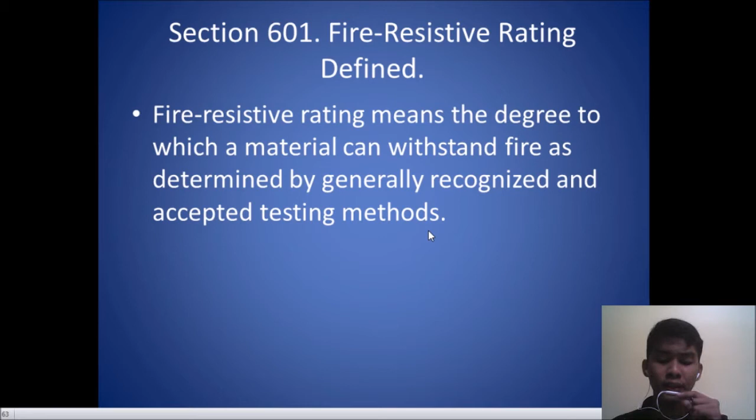Section 601, fire-resistive rating defined. Fire-resistive rating means the degree to which a material can withstand fire as determined by generally recognized and accepted testing methods. This means a material is being measured and given a rate on how high it can resist fire.

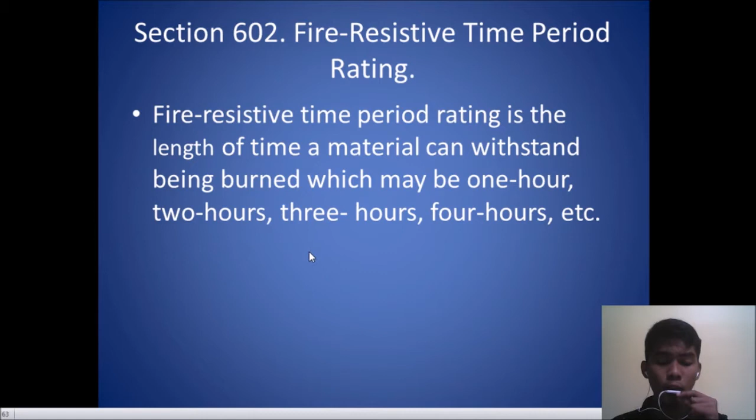Second, Section 602, fire-resistive time period rating is the length of time a material can withstand being burned, which may be 1 hour, 2 hours, 3 hours, 4 hours, etc. This means a material is measured on how long it can resist fire.

Third, Section 603, Fire-Resistive Standards. All materials of construction, and assemblies or combination thereof shall be classified according to their fire retardant or flame spread ratings as determined by generally accepted testing methods and or by the Secretary. There are materials that claim they can resist fire, however, there are certain standards to be followed. It should also be tested before they can claim fire resistance.

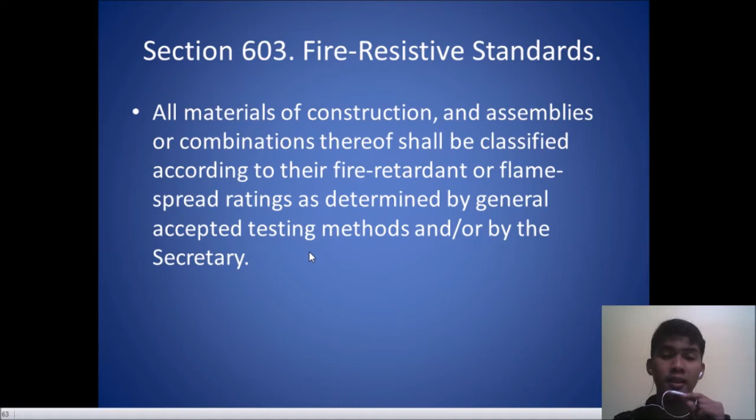Next, Section 604, Fire-Resistive Regulations. The Secretary shall prescribe standards and promulgate rules and regulations on the testing of construction materials for flame spread characteristics, test of fire damages, fire test of building, construction, and materials, door assemblies and tin-clad fire doors and window assemblies, and the installation of fire doors and windows and smoke and fire detectors for fire protective signaling systems.

Application and use of controlled interior finish. Fire-resistive protection for structural members. Fire-resistive walls and partitions. Fire-resistive floor or roof ceiling. Fire-resistive assemblies for protection of openings and fire retardant roof coverings.

From this section, there are certain standards and rules for testing the construction of materials for fire testing, also on how to assemble and where to place it in a certain area. All of those rules should be followed to avoid any complication.

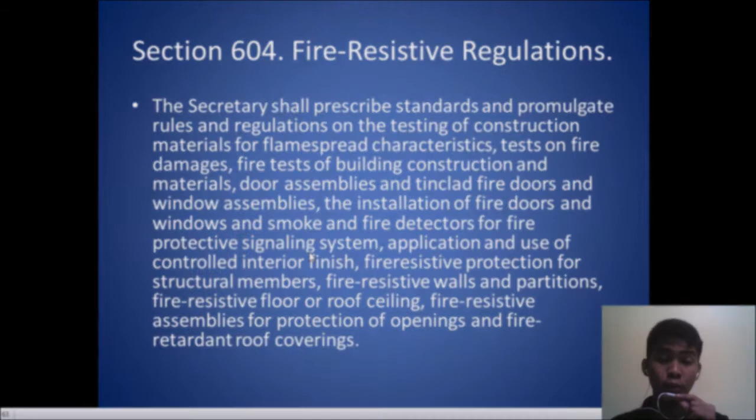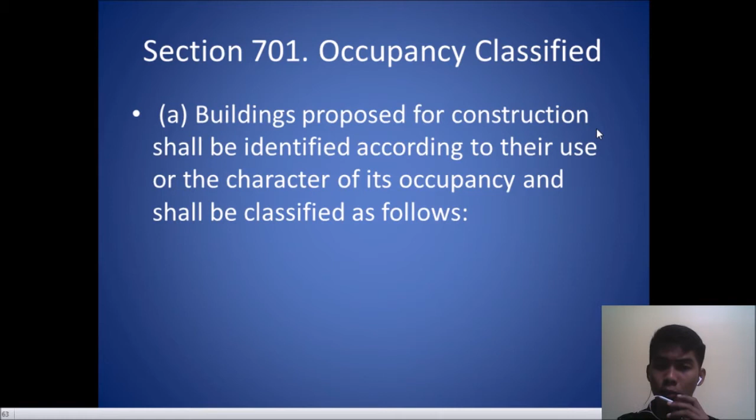To Chapter 7, Classification and General Requirement of all buildings by use or occupancy. Section 701, Occupancy Classified. Buildings proposed for construction shall be identified according to the use or the character of its occupancy and shall be classified as follows: Group A, residential dwellings; Group B, residential hotels and apartments; Group C, education and recreation; Group D, institutional; Group E, business and mercantile; Group F, industrial.

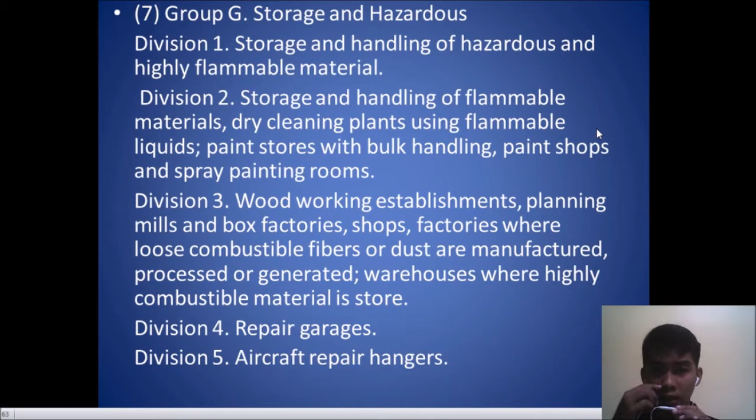Group G, storage and hazardous. Under this, Division 1, storage and handling of hazardous and highly flammable materials. Division 2, storage and handling of flammable materials, dry cleaning plants using flammable liquids, paint stores with bulk handling, paint shops and spray painting rooms. Division 3, woodworking establishments, planing mills and box factories, shops, factories where loose combustible fibers or dust are manufactured, processed or generated, warehouses where highly combustible material is stored.

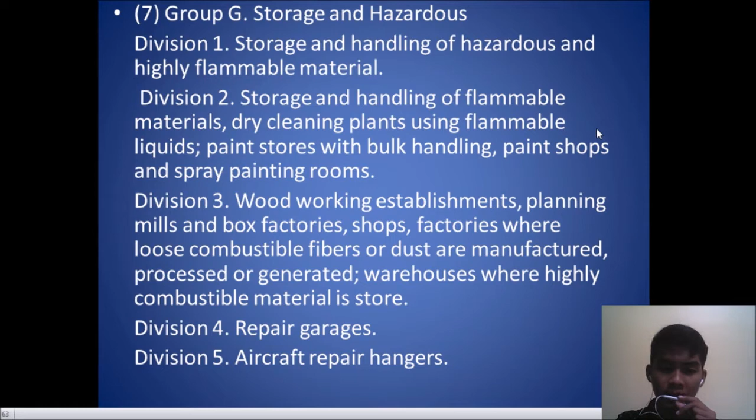Division 4, repair garages. Division 5, aircraft repair hangars. So Group H, assembly other than Group I. Division 1, any assembly building with a stage and an occupant load of less than 1,000 in the building. Division 2, any assembly building without stage and having an occupant load of 300 or more in the building. Division 3, any assembly building without a stage and having an occupant load less than 300 in the building. Division 4, stadia, reviewing stands, amusement structures not included with Group I or in Division 1, 2, 3 of this group.

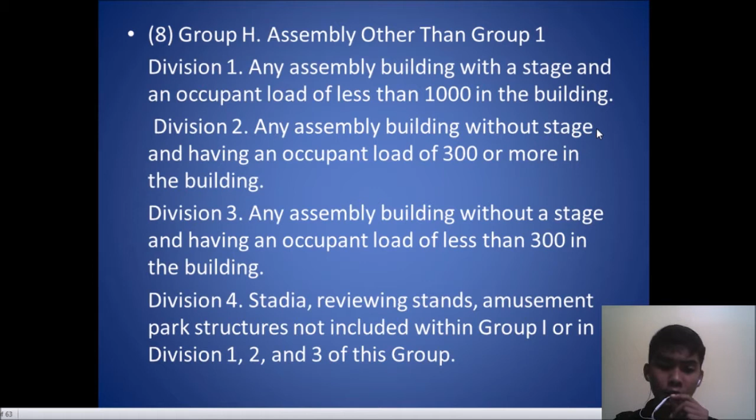Then Group I, assembly occupant load 1,000 or more. Group J, Accessory. Division 1, private garage, carport, sheds, and agriculture buildings. Division 2, fences over 1.80 meters high, tanks, and towers.

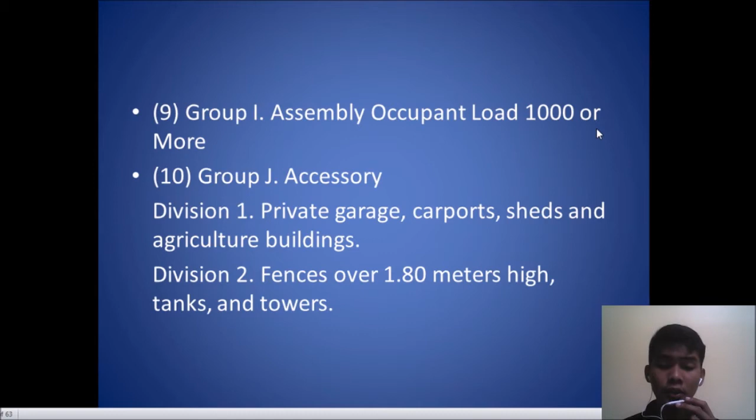So for this section, it allows us to know the classification of occupancy. This way, this classification can be thoroughly examined. What are the requirements needed?

Section 702, Change in use. No change shall be made in the character of occupancy or use of any building which would place the building in a different division of the same group of occupancy or in a different group of occupancies unless such building is made to comply with the requirements of this code for such division or group of occupancy.

So this means there shall be no changes on the occupancy category of a building. For example, if the building was a commercial building before and that is being used as a hospital, that is not allowed, unless the building is made to comply with the requirements of the code for such division.

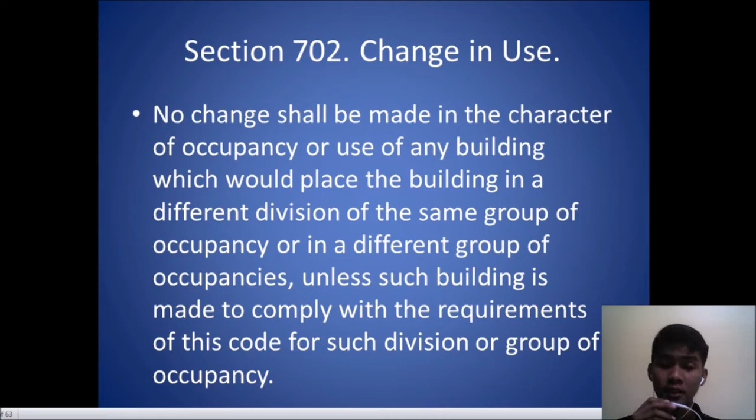Next is Section 703, Mixed Occupancy. There are general requirements when a building is of mixed occupancy or used for more than one occupancy. The whole building shall be subject to the most restrictive requirements pertaining to any of the types of occupancy found therein, except in the following.

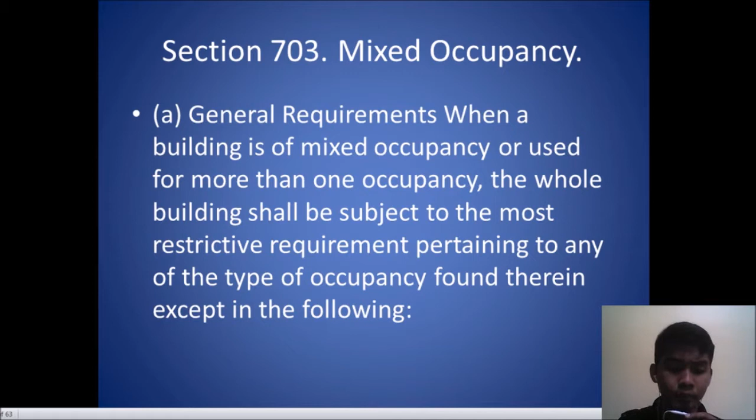A. When a one-story building houses more than one occupancy, each portion of the building shall conform to the requirement of the particular occupancy housed therein. Number 2. Where minor accessory uses do not occupy more than 10% of the area of any floor of a building, nor more than 10% of the basic area permitted in the occupancy requirements, in which case the major use of the building determines the occupancy classification.

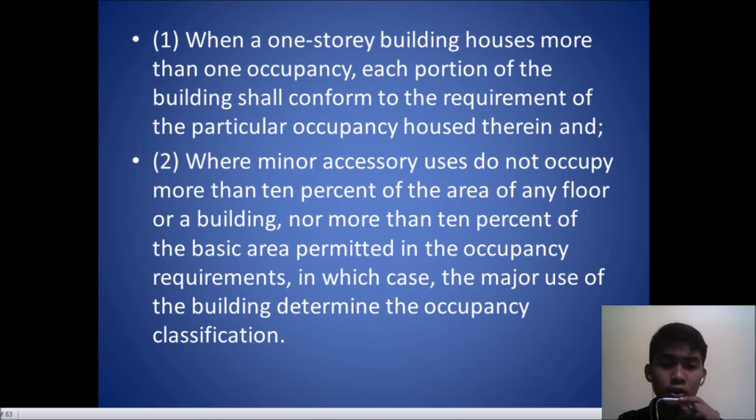B. Forms of occupancy separation. C. Types of occupancy separation. And D is fire rating for occupancy separation. So this means that the building is a multi-purpose building which may have more than one occupancy. It will be subjected to more restrictive requirements which can abide by both occupancy requirements.

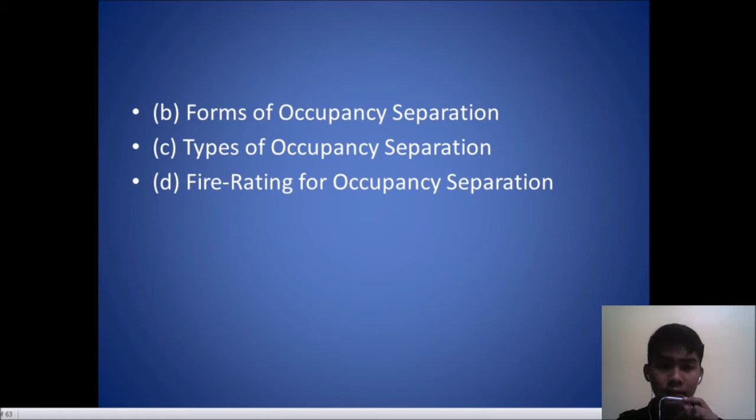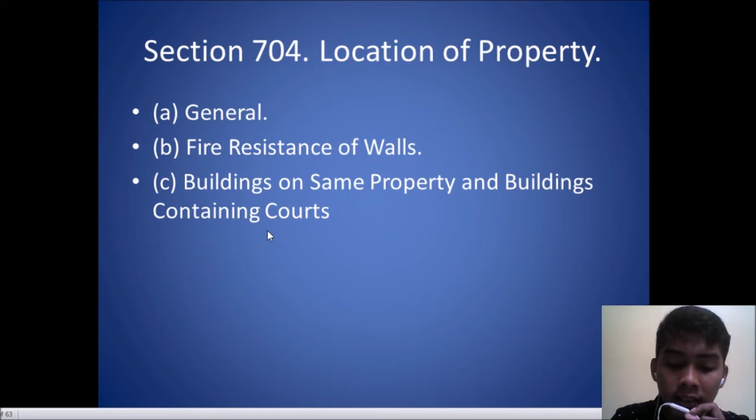So next, Section 704, location of property. First, general. B. Fire resistance of walls. C. Buildings on same property and buildings containing courts. So it means the location of the building shall have a direct access to public space or yard. The property line should be considered adjacent to the street.

So Section 705, allowable floor areas. For purposes of this section, each portion of a building separated by one or more area separation walls may be considered a separate building provided the area separation walls meet the requirements prescribed therefor by the Secretary. There should be one or more area separation walls considered, and they shall be in accordance with the prescribed requirements of the Secretary.

706. Allowable floor area increases. The floor areas hereinabove provided may be increased in certain specific instances and under appropriate conditions, based on the existence of public space, streets or yards extending along and adjoining two or more sides of the building or structure, subject to the approval of the building official. It means floor area may be increased with specific conditions and also shall be approved by the building official.

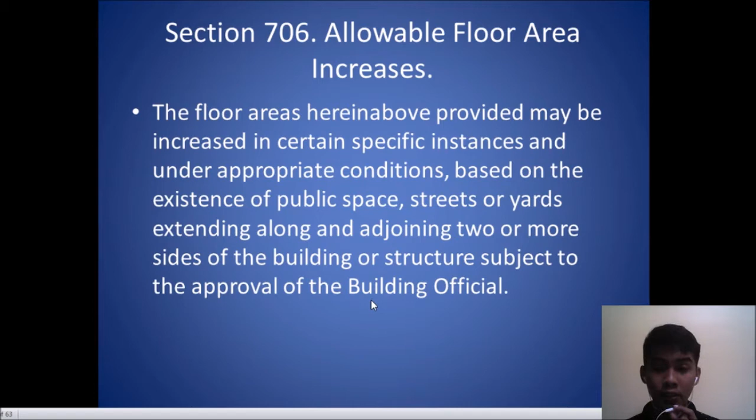Next, Section 707, maximum height of buildings. So in this section, it means the height of the building per floor depends on how the building is going to be used. It will depend on the occupancy classification.

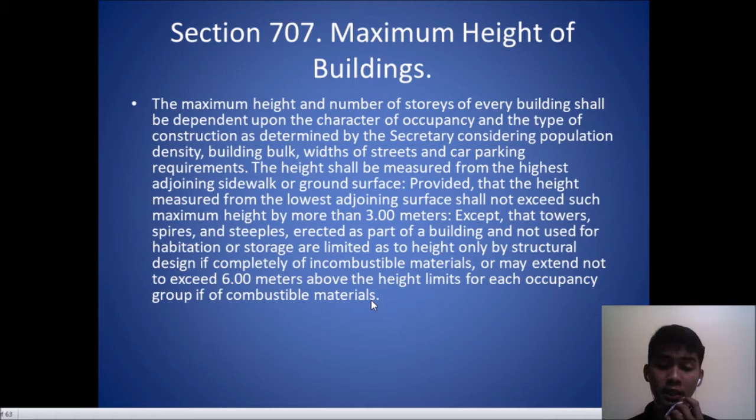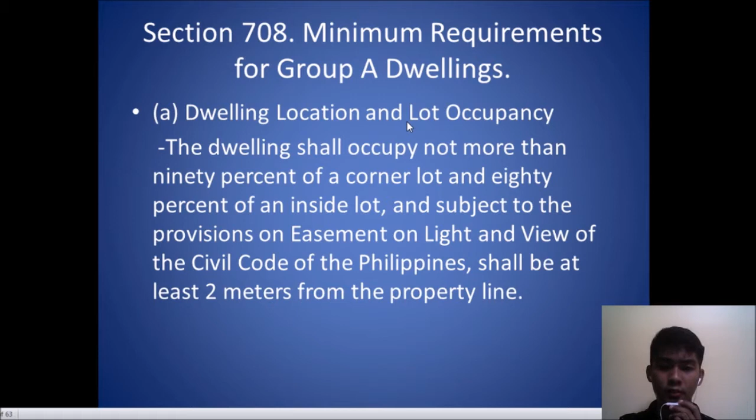Next, Section 708, minimum requirements for Group A dwellings. A. Dwelling location and lot occupancy. The dwelling shall occupy not more than 90% of a corner lot and 80% of an inside lot, and subject to the provisions on easement on light and view of the Civil Code of the Philippines, shall be at least 2 meters from the property line. So 2 meters from the property line.

B. Light and ventilation. Every dwelling shall be so constructed and arranged as to provide adequate light and ventilation as provided under Section 805 of this code. C. Sanitation. Every dwelling shall be provided with at least one sanitary toilet and adequate washing and drainage facilities.

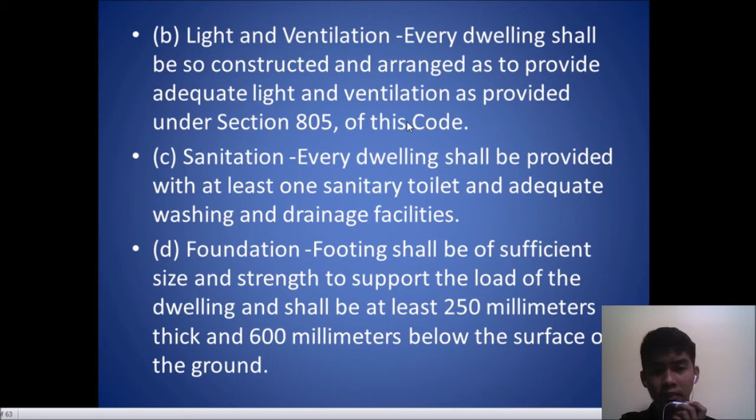Next, posts. Then, floor. The live load of the first floor shall be at least 200 kilograms per square meter, and for the second floor at least 150 kilograms per square meter. Roof. The wind load for roof shall be at least 120 kilograms per square meter for vertical projection. Stairs. Stairs shall be at least 750 millimeters in clear width with a rise of 200 mm and a minimum run of 200 mm.

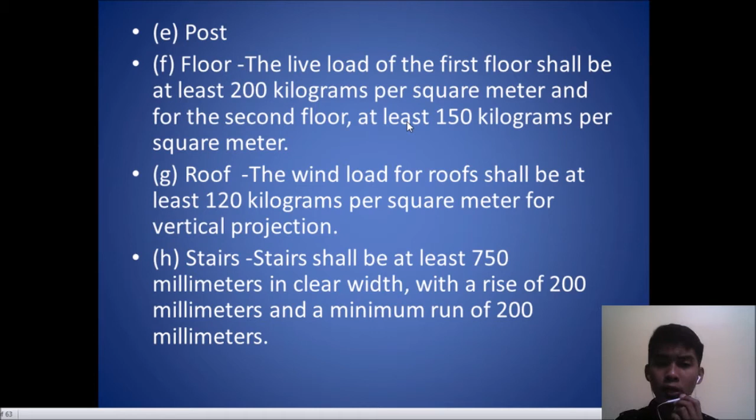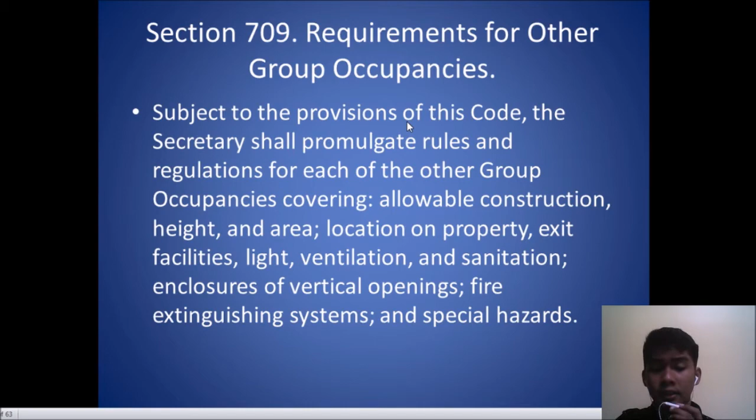So entrance and exit, then electrical requirements and mechanical requirements. So Section 708 explains the minimum requirements for Group A dwellings. Then Section 709, the Secretary. This means that the Secretary shall provide rules and regulations for other group occupancies covering allowable construction, height and area.

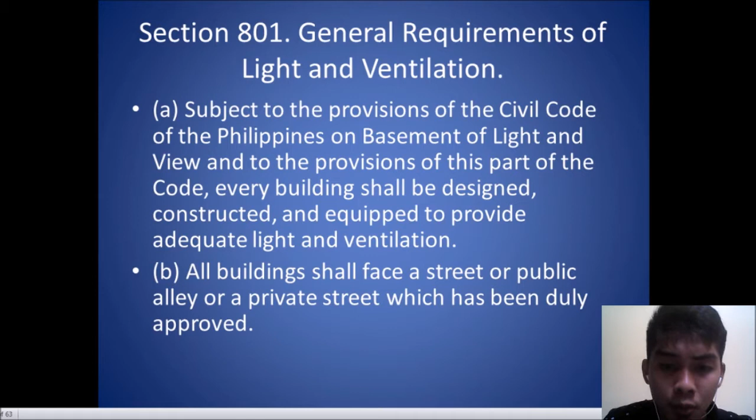Chapter 8. Light and ventilation. Section 801, general requirements of light and ventilation. Letter A. Subject to the provisions of the Civil Code of the Philippines on easement of light and view, and to the provisions of this part of the code, every building shall be designed, constructed, and equipped to provide adequate light and ventilation. All buildings shall face a street or public alley or private street which has been duly approved.

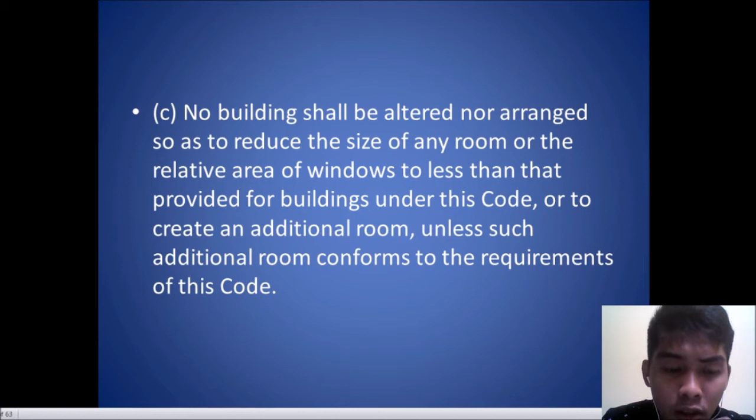No building shall be altered nor arranged so as to reduce the size of any room or the relative area of windows to less than that provided for buildings under this code, or to create additional room unless such additional room conforms to the requirements of this code. D. No building shall be enlarged so that the dimensions of the required court or yard would be less than that prescribed for such building.

So in this section, buildings shall be provided with the proper light and ventilation. Also, it shall face a street or public alley. Also, it shall follow the prescribed dimension of any room.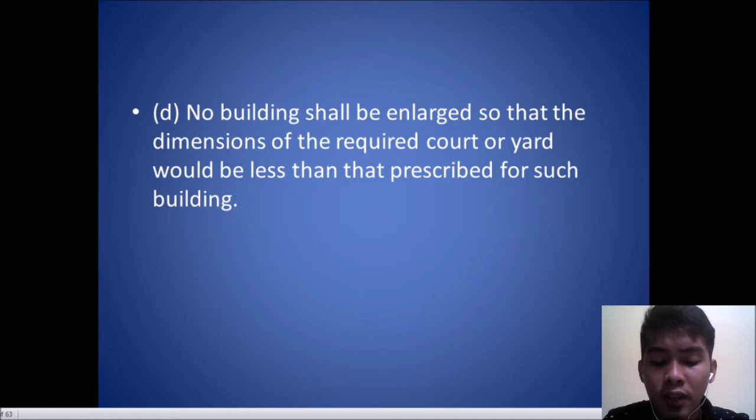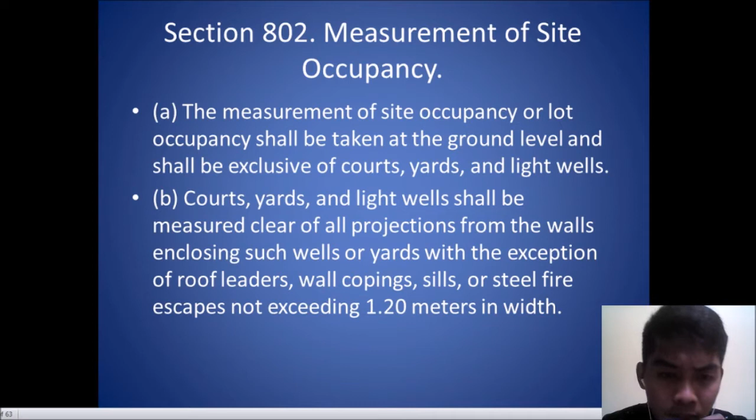Then, Section 802, measurement of site occupancy. The measurement of site occupancy or lot occupancy shall be taken at ground level and shall be exclusive of courts, yards, and light wells. Courts, yards, and light wells shall be measured clear of all projections from the walls enclosing such wells or yards, with the exception of roof leaders, wall copings, sills, or steel fire escapes not exceeding 1.2 meters in width.

Section 803, percentage of site occupancy. Maximum site occupancy shall be governed by the use, type of construction, and height of the building, and the use, area, nature, and location of the site, and subject to the provisions of the local zoning requirements and in accordance with the rules and regulations promulgated by the Secretary.

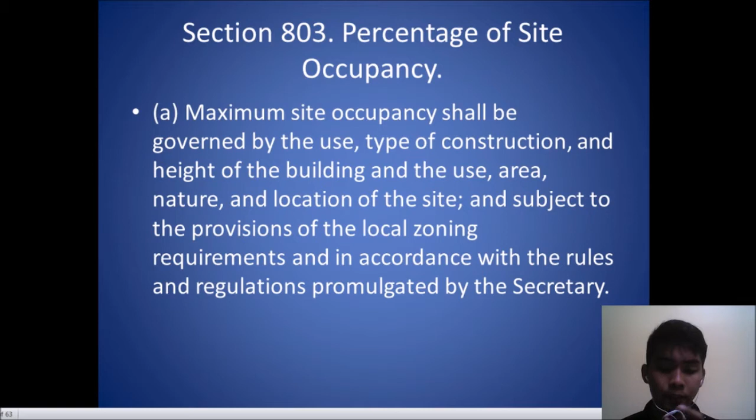Then size and dimensions of courts. Minimum size of courts and their least dimensions shall be governed by the use, type of construction, and the height of the buildings provided in the rules and regulations promulgated by the Secretary, provided that the minimum horizontal dimension of courts shall be not less than 2 meters. B. All inner courts shall be connected to a street or yard, either by a passageway with a minimum width of 1.2 meters, or by a door through a room or rooms.

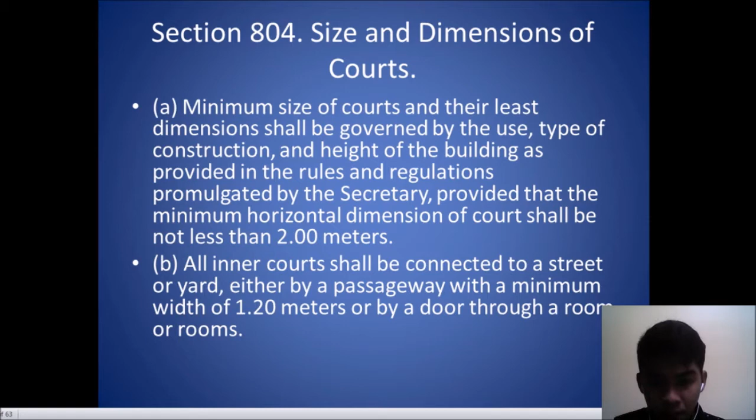This means that the minimum horizontal dimension of a court shall not be less than 2 meters and inner courts shall be connected by a passageway with a minimum width of 1.2 meters. So,

Section 805, ceiling height. Habitable rooms provided with artificial ventilation have ceiling heights not less than 2.4 meters, measured from the floor to the ceiling, provided that for buildings of more than one story, the minimum ceiling height of the first story shall be 2.7 meters, and that for the second story, 2.4 meters, and succeeding stories shall have an unobstructed typical head clearance of not less than 2.1 meters above the finished floor line.

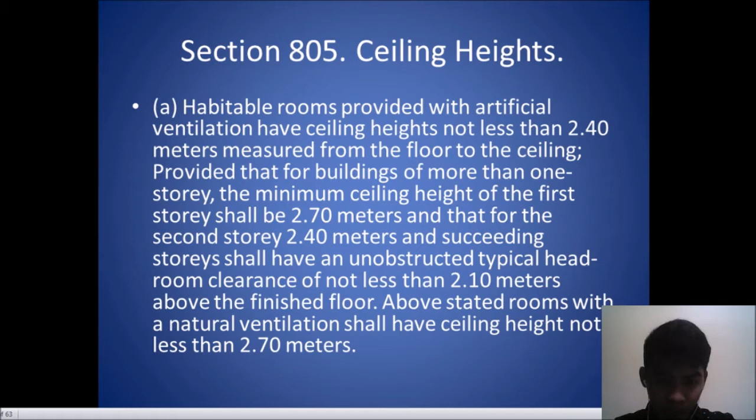Above stated rooms with natural ventilation shall have ceiling height not less than 2.7 meters. B. Mezzanine floors shall have a clear ceiling not less than 1.8 meters above and below it.

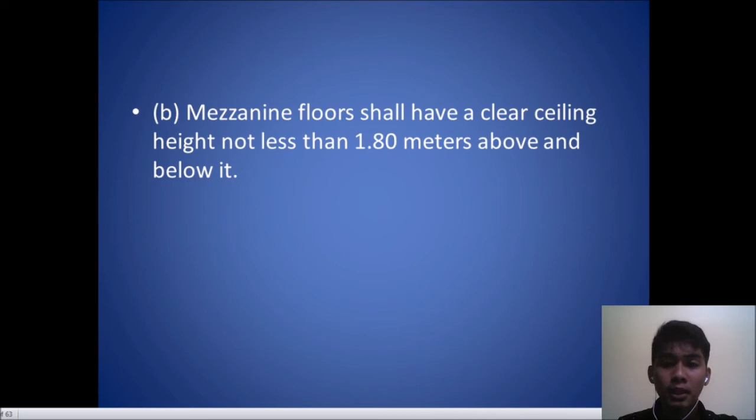So, section 806, size and dimensions of rooms. Minimum sizes of rooms and their least horizontal dimensions shall be as follows. Number 1. Rooms for human habitation, 6 square meters with a dimension of 2.

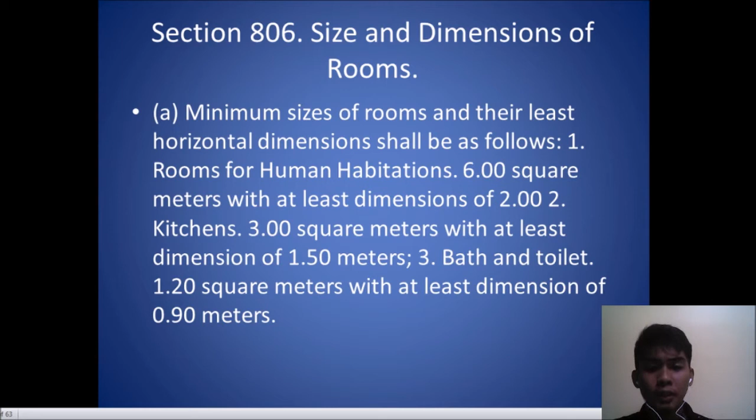So, section 807, air space requirements in determining the size of rooms. A minimum space shall be provided as follows. School rooms, 3 cubic meters with 1 square meter of floor area per person. Again, 3 cubic meters with 1 square meter of floor area per person. Number 2, workshops, factories, and offices, 12 cubic meters of space per person. Number 3, habitable rooms, 14 cubic meters of space per person.

So in this section, it's per person and space.

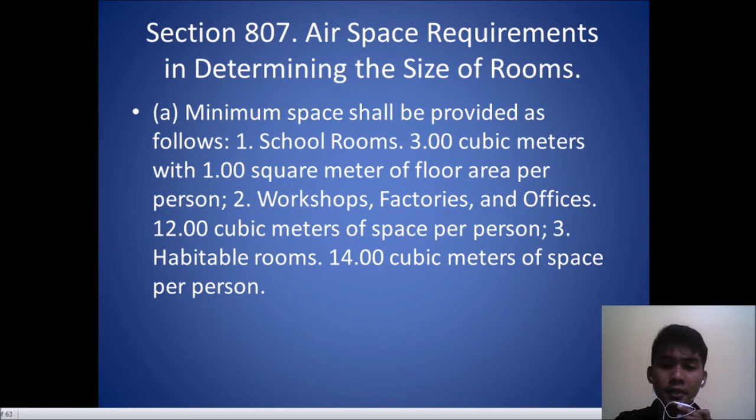So section 808, window openings. Every room intended for any use not provided with artificial ventilation system as specified in this code shall be provided with a window or windows with a total free area of openings equal to at least 10% of the floor area of the room. Such window shall open directly to a court, yard, public street or alley or open water courses. So, for a room intended for any use, a window shall be provided if there is no artificial ventilation.

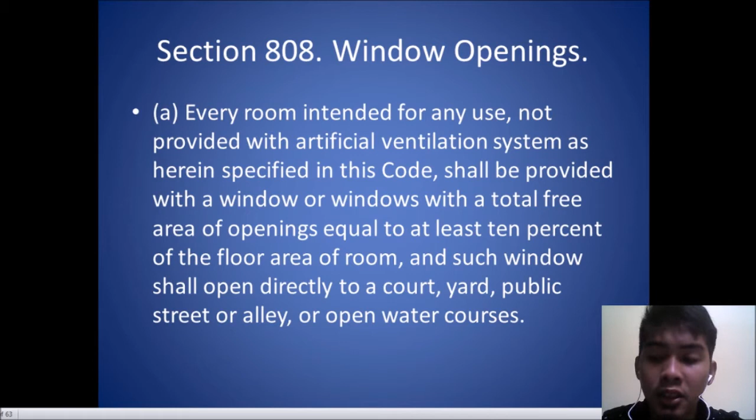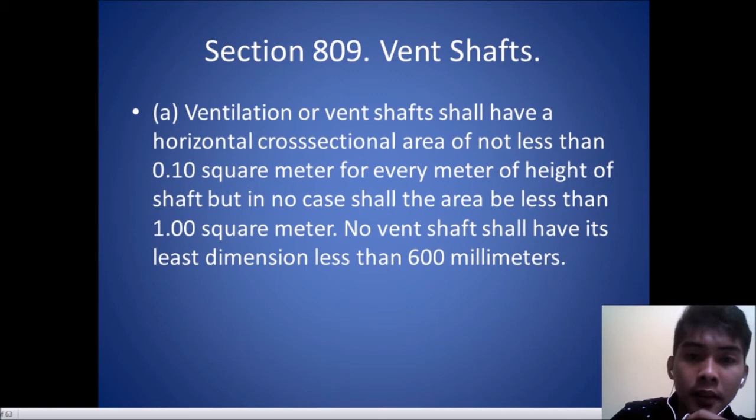Section 809, vent shafts. A. Ventilation or vent shafts shall have a horizontal cross-sectional area of not less than 0.1 square meter for every meter of height of shaft, but in no case shall the area be less than 1 square meter. No vent shaft shall have its least dimension less than 600 mm. B. Skylights, unless open to the outer air at the top for its full area, vent shafts shall be covered by a skylight having a net free area of fixed louver openings equal to the maximum required shaft area.

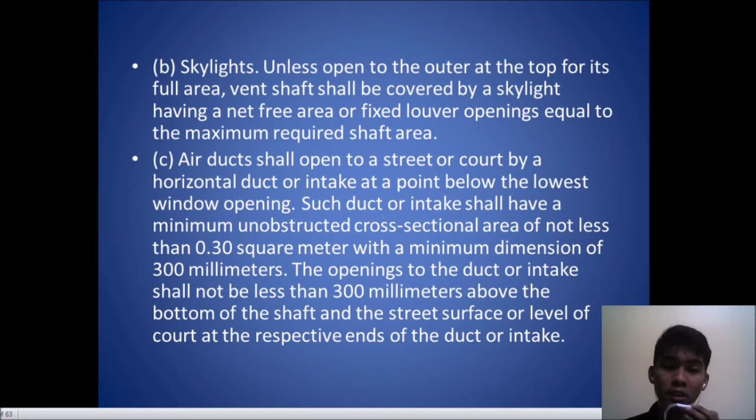C. Air ducts shall open to a street or court by a horizontal duct or intake at a point below the lowest window opening. Such duct or intake shall have a minimum unobstructed cross-sectional area of not less than 0.3 square meter with a minimum dimension of 300 mm. The openings to the duct or intake shall not be less than 300 mm above the bottom of the shaft and the street surface or level of the court at the respective ends of the duct or intake.

So section 810, ventilation skylights. A skylight shall have a glass area not less than that required for the windows that are replaced. They shall be equipped with movable sashes or louvers with an aggregate net free area not less than that required for openable parts in the windows that are replaced, or provided with approved artificial ventilation of equivalent effectiveness.

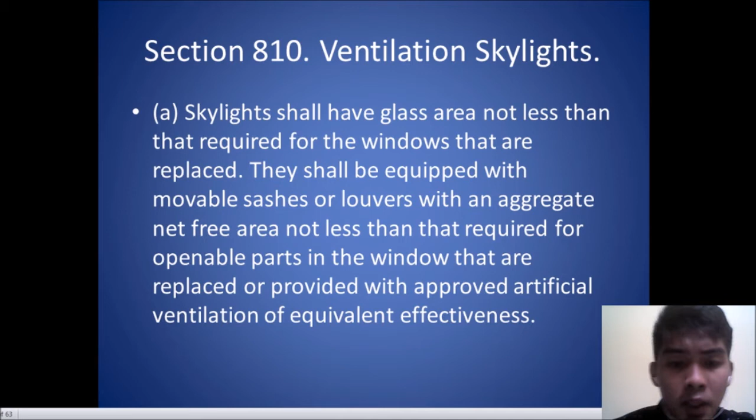Section 811, artificial ventilation. Rooms or spaces housing industrial or heating equipment shall be provided with artificial means of ventilation to prevent excessive accumulation of hot or polluted air. B. Whenever artificial ventilation is required, the equipment shall be designed and constructed to meet the following minimum requirements in air changes.

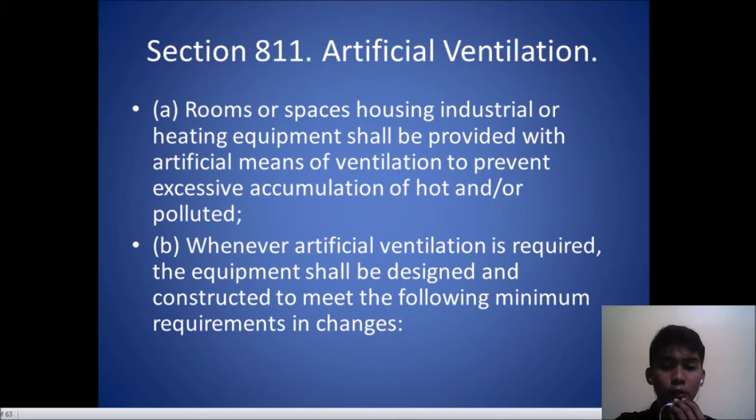For rooms entirely above grade in use for office, clerical, or administrative purposes, or as stores, sales rooms, restaurants, markets, factories, workshops, and machinery rooms, not less than 3 changes of air per hour shall be provided. So, for rooms entirely above the grade, not less than 3 changes of air per hour.

So, number 2, for rooms entirely above grade used as bakeries, hotel or restaurant kitchens, laundries other than accessory to dwellings and boiler rooms, not less than 10 changes of air per hour.

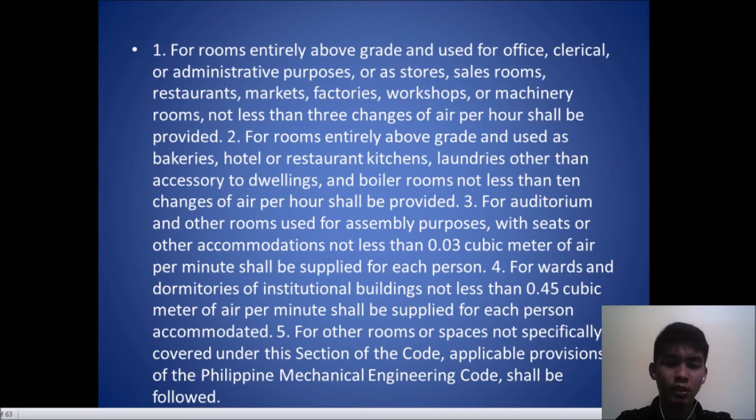Air per minute. Number 5, for other rooms or spaces not specifically covered under this section of the code, applicable provisions of the Philippine Mechanical Engineering Code shall be followed. Chapter 9, Sanitation. So, there are three sections. 901, General.

Subject to the provisions of Book 2 of the Civil Code of the Philippines on property, ownership, and its modification, all buildings hereafter erected, altered, removed, relocated, or repaired for human habitation shall be provided with adequate and potable water supply, plumbing installation, and suitable wastewater treatment or disposal system, storm water drainage, pest and vermin control, noise abatement device,

and such other measures required for the protection and promotion of health of persons occupying the premises and others living nearby. So, after a building is erected, it shall be provided with potable water and other drainage system.

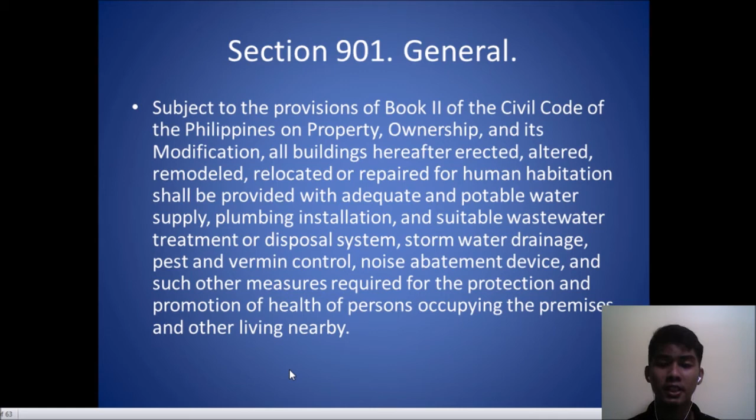So water supply system. Whenever available, the potable water requirements for a building used for human habitation shall be supplied from existing municipal or city waterworks system. So as I said earlier, the supply here in Davao City is the water district, Dumoy.

Then, quality of drinking water from meteoric, surface or underground sources shall conform to the criteria set in the latest approved national standards for drinking water. So, an example of this is in the design. Construction and operation of deep wells for the abstraction of groundwater shall be subject to the provisions of the Water Code of the Philippines.

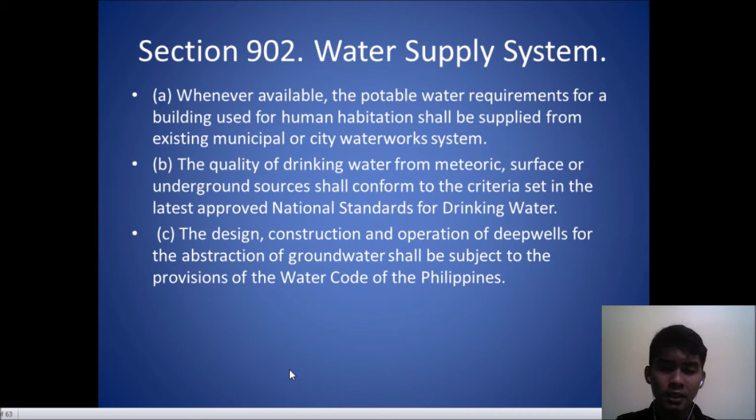Then, construction and operation of independent waterworks systems of private housing subdivisions or industrial estates shall be governed by existing laws relating to local waterworks system. So the water piping installations inside buildings and premises shall conform to the provisions of the National Plumbing Code of the Philippines.

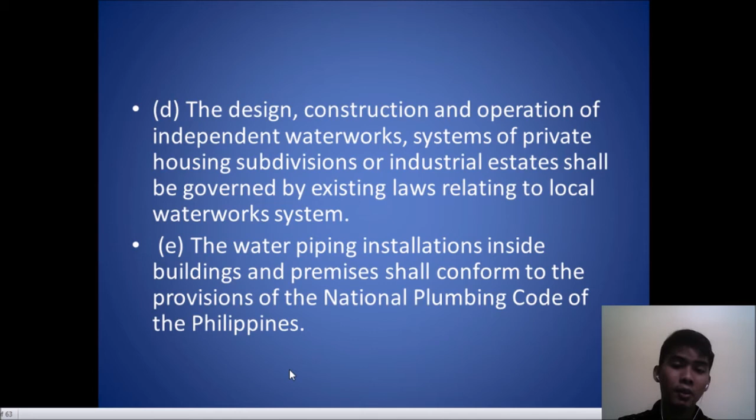Then, Section 903, wastewater disposal system. Sanitary sewage from buildings, neutralized or pretreated industrial wastewater shall be discharged directly into the nearest street sanitary sewer main of existing municipal or city sanitary sewerage system in accordance with the criteria set by the Code on Sanitation and National Pollution Control Commission.

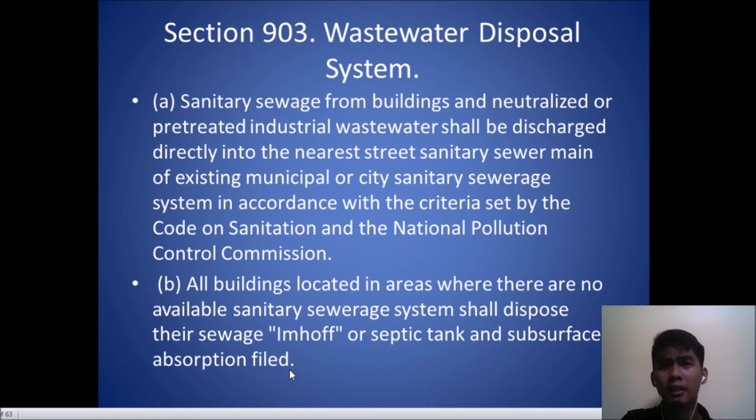All buildings located in areas where there are no available sanitary sewerage systems shall dispose their sewage in Imhoff or septic tank and subsurface absorption field. Then, sanitary and industrial plumbing installations inside buildings and premises shall conform to the provisions of the National Plumbing Code.

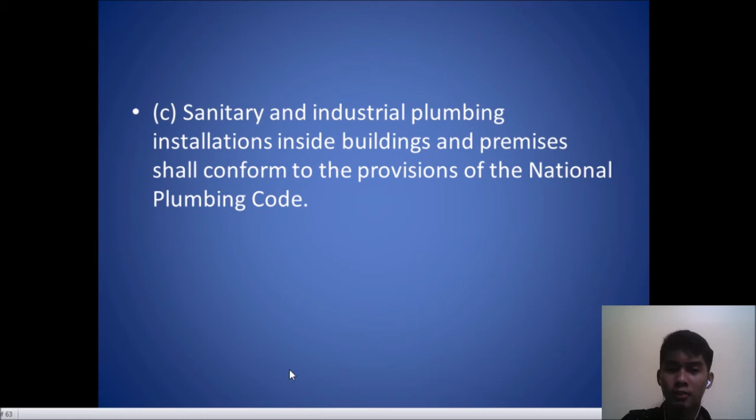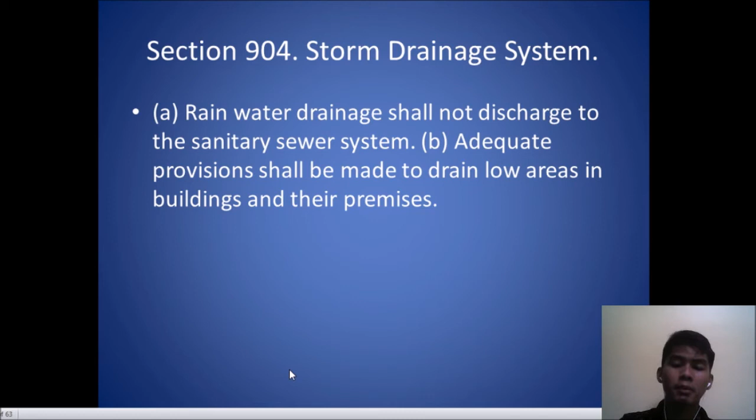Then, Section 904, Storm Drainage System. Rainwater drainage shall not discharge to the sanitary sewer system. Adequate provision shall be made to drain low areas in buildings and their premises. Then, Section 905, Pest and Vermin Control. All buildings with hollow and/or wood construction shall be provided with rat-proofing.

Then, garbage bins and receptacles shall be provided with ready means for cleaning and with positive protection against entry of pests and vermin.

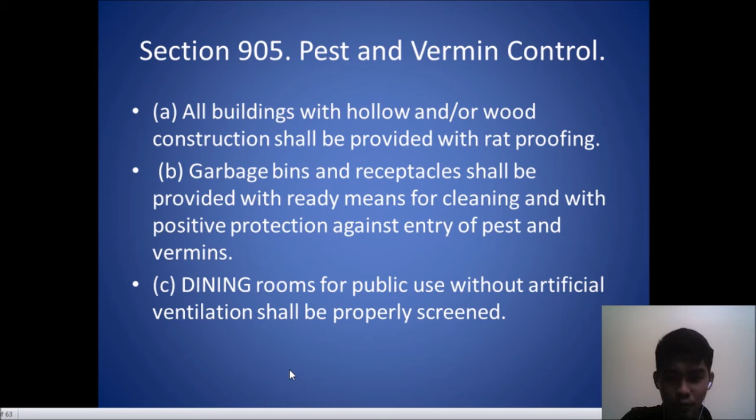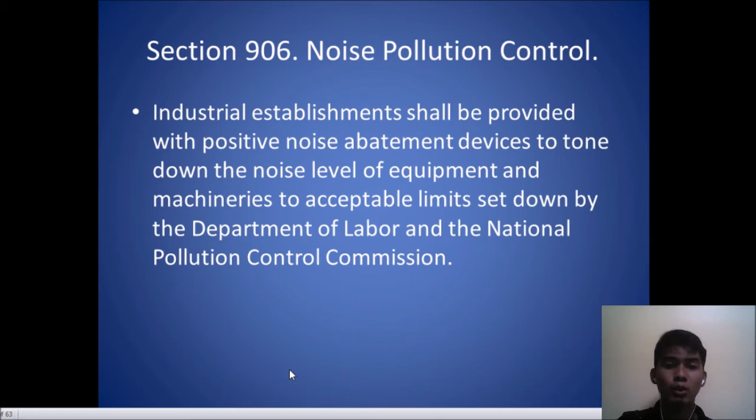Dining rooms for public use without artificial ventilation shall be properly screened. Then, Section 906, Noise Pollution Control. Industrial establishments shall be provided with positive noise abatement devices to tone down the noise level of equipment and machinery to acceptable limits set down by the Department of Labor and the National Pollution Control Commission.

So, Section 907, pipe materials. All pipe materials to be used in buildings shall conform to the standard specifications of the Philippine Standards Council. So, the pipes we use should pass the Philippine Standards Council.

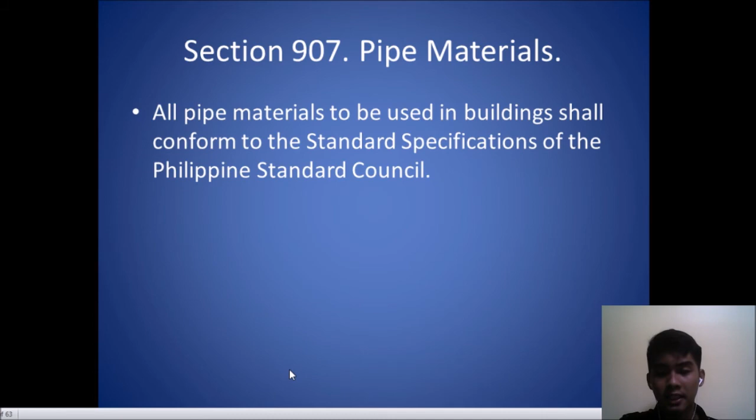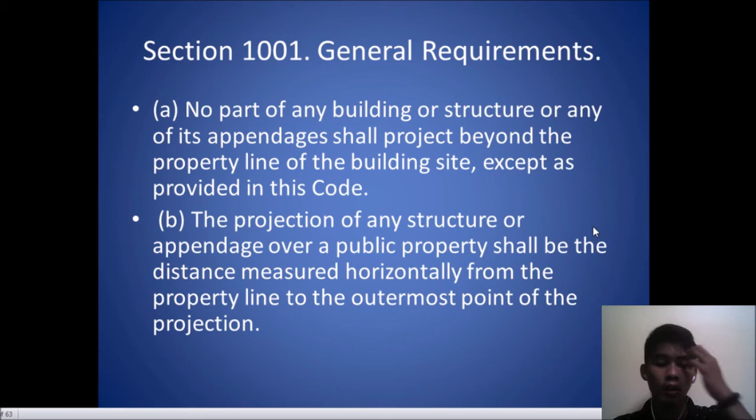So under Section 1001, general requirements, no part of any building or structure or any of its appendages shall project beyond the property line of the building site except as provided in this code. The projection of any structure or appendage over a public property shall be the distance measured horizontally from the property line to the outermost point of the projection. So this means that any building, accessory, or structure shall be within the property line.

Then Section 1002, projection into alleys or streets. No part of any structure or its appendage shall project into any alley or street, national road or public highway except as provided in this code. Footings located at least 2.4 meters below grade along national roads or public highways may project not more than 300 mm beyond the property line.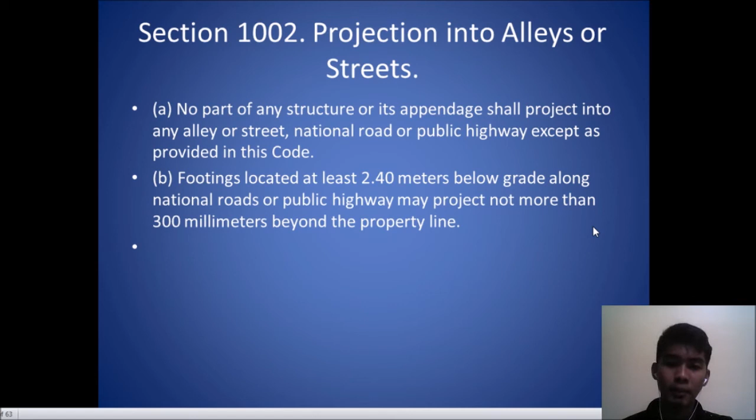Then foundations. Foundations may be permitted to encroach into public sidewalk areas to a width not exceeding 500 mm, provided that the top of the said foundation is not less than 600 mm below the established grade, provided further that said projection does not obstruct any existing facility such as power, communication, gas, water, or sewer lines unless the owner concerned shall pay to the corresponding entities for the rerouting of the parts of the affected facilities.

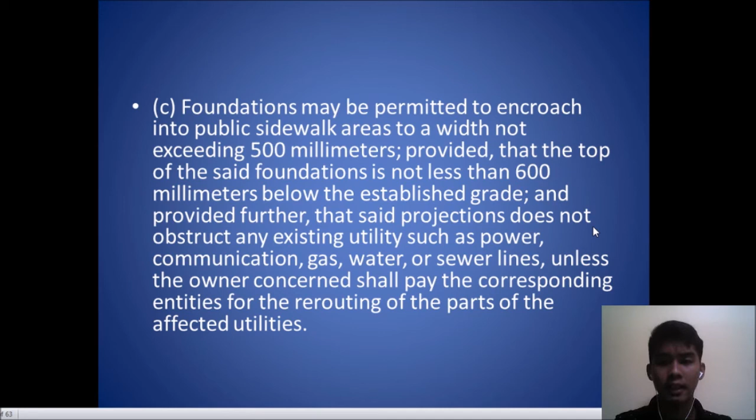Then Section 1003, projection of balconies and appendages over streets. The extent of any projection over an alley or street shall be uniform within a block and shall conform to the limitations set forth in Table 1003A, projection of balconies and appendages, Annex B2. So, there's a table 1003.

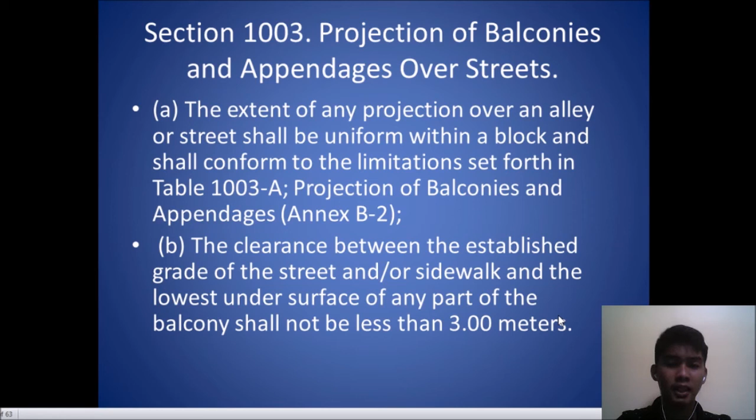The clearance between the established grade of the street or sidewalk and the lowest undersurface of any part of the balcony should not be less than 3 meters. So, it should not be less than 3 meters. It may exceed 3 meters, the clearance between the established grade and the street or sidewalk.

Then, Section 1004, arcades. Whenever required by existing building and zoning regulations, arcades shall be constructed on sidewalks of streets. The width of the arcade and its height shall be uniform throughout the street, provided that in no case shall an arcade be less than 3 meters above the established sidewalk. So, our arcades should not be less than 3 meters.

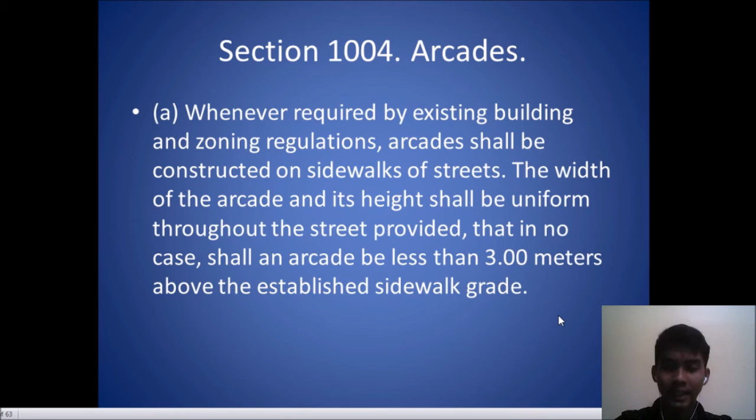Then, Section 1005, canopies or marquees. Definition: a canopy or marquee is a permanent roof structure above a door attached to and supported by a building and projecting over a wall or sidewalk. This includes any object or decoration attached thereto. So, all of that is part of the canopy structure. It is a structure above, attached to and supported by the building.

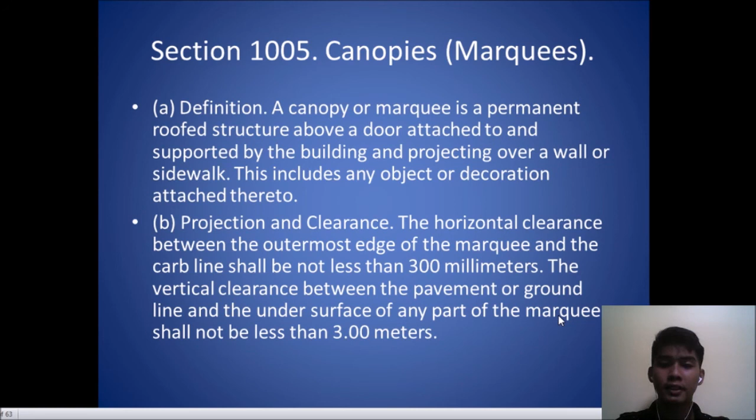So, projection and clearance. The horizontal clearance between the outermost edge of the marquee and the curb line shall be not less than 300 mm. The vertical clearance between the pavement or the ground line and the undersurface of any part of the marquee cannot be less than 3 meters. So, that's the projection clearance: not less than 300 mm, and between the ground line and the undersurface of any part of the marquee, not less than 3 meters.

So, construction. Marquees shall be constructed of incombustible material or any materials of not less than 2 hours fire-resistive construction, and shall be provided with necessary drainage facility. So, in Chapter 6, the 2-hour limitation on fire resistance was discussed. In Chapter 6, 602, a material is measured by how long it resists fire, whether 2 hours, 3 hours, or 1 hour. So, here it's not less than 2 hours fire-resistive construction.

So, location. Every marquee shall be so located as not to interfere with the operation of any exterior standpipe connection, or obstruct the clear passage from stairways or exits from the building, or the installation and maintenance of electroliers.

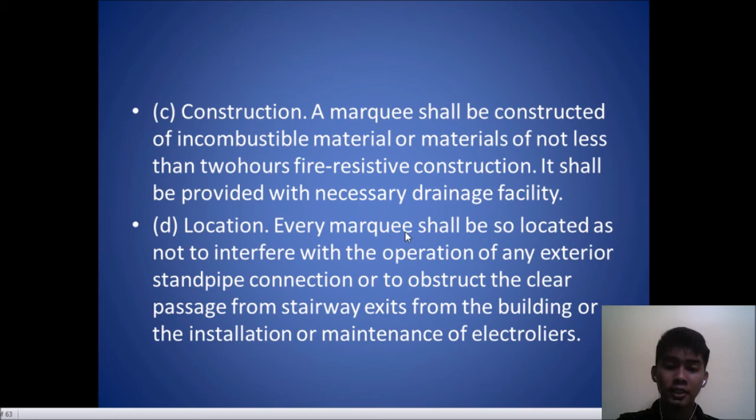So, Section 1006, movable awnings or hoods, definition. An awning is a movable shelter supported entirely from the exterior wall of the building and of a type which can be retracted, folded, or collapsed against the face of the supporting building. B. Clearance. The horizontal clearance between the awning and the curb line cannot be less than 300 mm. The vertical clearance between the undermost surface of the awning and the pavement or the ground line cannot be less than 2.4 meters. Collapsible awnings shall be so designed that they shall not block a required exit when collapsed or folded. So, you should follow the proper regulations.

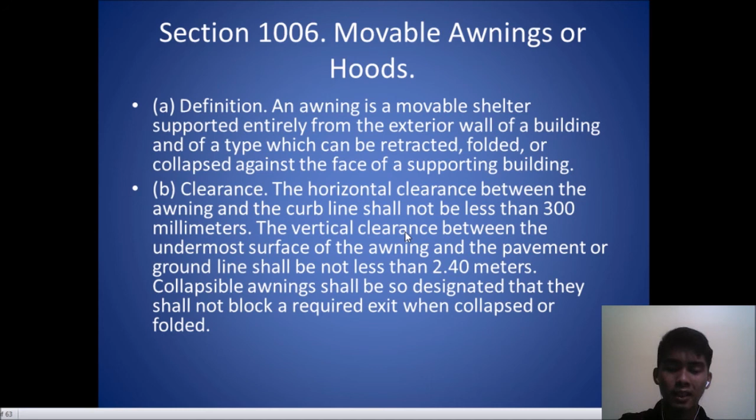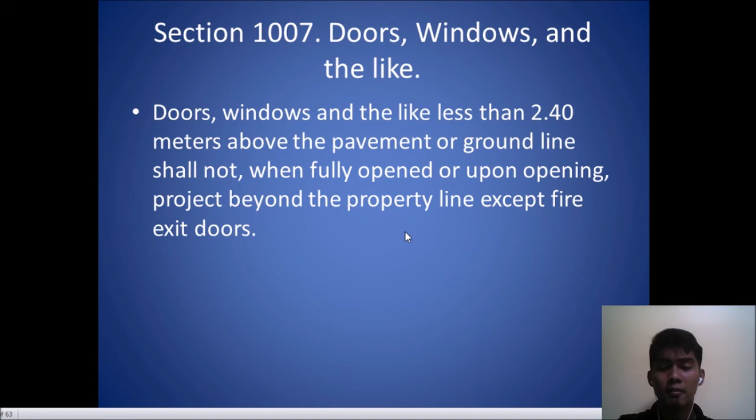So, Section 1007, doors, windows, and the like. Doors, windows, and the like, less than 2.40 meters above the pavement or the ground line, cannot be fully open or upon opening project beyond the property line except fire exit doors. So, that should follow the proper laws.

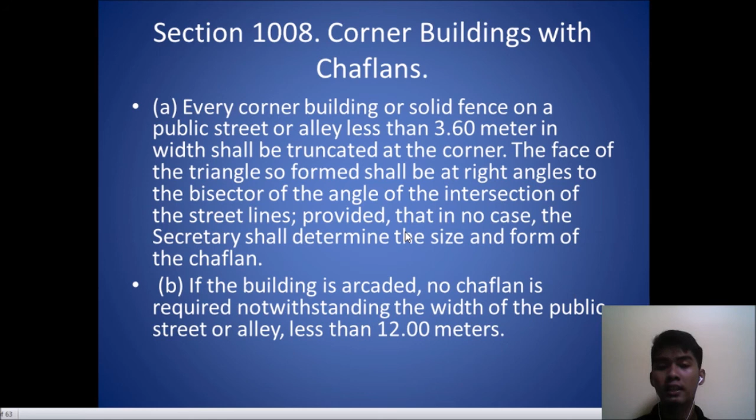So, Section 1008, corner buildings with chaflans. Every corner building or solid fence on a public street or alley less than 3.6 meters in width shall be truncated at the corner. The face of the triangle so formed shall be at right angle to the bisector of the angle of the intersection of the street lines, provided that in no case shall the Secretary determine the size and form of the chaflan. So if the building is arcaded, no chaflan is required, notwithstanding the width of the public street being less than 12 meters.